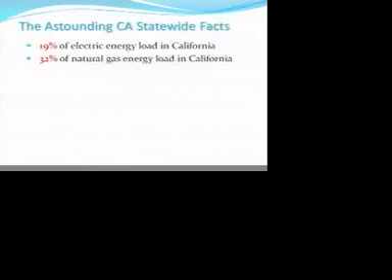32% of their gas load was related to the heating of hot water. So it seemed intuitively obvious that if you then could conserve water, you would be conserving energy, and that is a very important connection to make for the energy efficiency community. And the Energy Commission went even further, and they said, well, let's take a look at what would be really cost-effective programs. We've done so much energy efficiency program work, we don't have the same kind of low-hanging fruit that they have in the water efficiency world.

What if we were to consider taking all of our energy efficiency money, and I think it's something like $500 million a year, and put it into water efficiency programs? What would that look like? And the Energy Commission concluded that they could get 95% of their 3-year energy efficiency goal with funding water efficiency programs at only 58% of the cost that they currently pay. So it's a good energy efficiency investment. That's the bottom line. Water efficiency is a good energy efficiency investment.

And those kinds of numbers, I think, are very useful. Even though it's California and water has moved great distances in California, you net out that long distance movement, it's still a sizable amount of energy benefit that can be gotten from water efficiency programs. At the individual city level, it has an impact. 33% of a city's municipal budget can be for water pumping, their electric bill, that is. 33% of their electric bill can be just for water pumping.

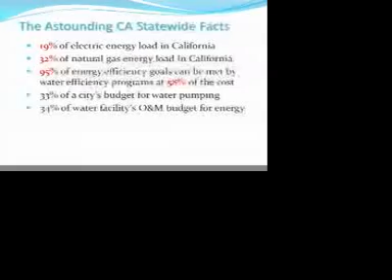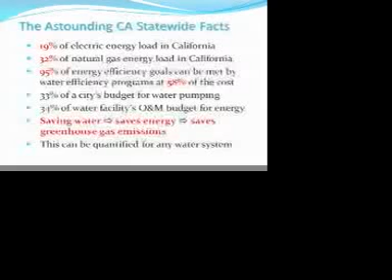34% of a water utility's O&M, operations and maintenance budget, often goes to energy because of the intensity of the treatment process. So all around, it's beneficial for the ratepayer, for the taxpayer, for the utility manager to look at water efficiency as an energy efficiency opportunity, because not only does it save energy, but it saves greenhouse gas emissions. And there has been a model developed that will quantify that for any water system.

And this is the Pacific Institute, again, getting involved in putting together a model for agricultural and urban water utilities who can take a look at their system operations and their water supply parameters and figure out how much embedded energy there is in their own water supply, and therefore in their water conservation programs should they undertake them, and compare it to their overall carbon footprint. So this model was developed by Gary Wolff at the Pacific Institute. I think it probably got some Energy Commission support and funding.

And now I know the Energy Foundation is looking at doing some further refinements to it, so there'll be new versions of it coming out that utilities around the country will be able to use. And so that work is underway, but you can go to the Pacific Institute website and you can download this model. Just go to pacinst.org, and in the search bar you just type in water to air model, and it'll pull up the page with the water and energy models for both the urban and agricultural water utilities.

So one particular water utility in California took that model and decided to test it, to do a little run through it. And Santa Clara Valley Water District, the wholesale water district that services the San Jose, Silicon Valley area, did an analysis of their operations, and they published a report called From Watts to Water. We have a couple of copies sitting there on the table. We also have the PDF of the report posted on our website, and I can email it to you if you give me your card.

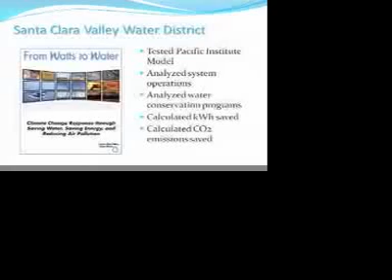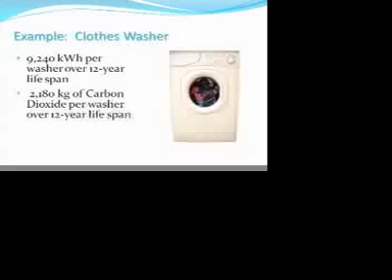But this is a terrific report because it is the first published example that I'm aware of a water utility taking a comprehensive look at what their embedded energy values are, and at what the benefits are of water efficiency technology to those analyses. So, for example, the clothes washer, they calculated in their particular program that they were basically saving over 9,000 kilowatt hours per washer over a 12-year lifespan of the washer. And they were conservative. They gave the washer only a 12-year lifespan, which I think we know is probably pretty conservative. And in that 12-year lifespan, they calculated that it saved over 2,000 kilograms of carbon dioxide per washer over that period.

And so if you aggregate all of their clothes washer examples, and you take all of their conservation programs that they've been undertaking since they started in, I believe it's 1992, the total energy savings that they've basically incurred in that program is equivalent to the energy that would be used by 236,000 households for 1 year. So that's water efficiency, that embedded energy translated into a direct energy savings that we had never really thought about before.

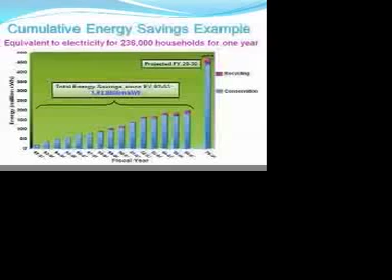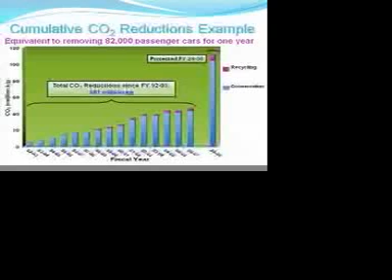And if you go further and you take that and convert that into greenhouse gas emission reductions, it ends up being equivalent in terms of carbon reductions to removing 82,000 passenger cars off of the road for a year. So this is a whole new benefit calculation that should help galvanize water efficiency efforts in water utilities, because not only do they have water scarcity issues to deal with, but they have energy scarcity issues and costs to deal with, which are often much higher than their supply costs are. And saving energy is an important benefit in their operations.

What are those opportunities? Well, of course, the energy benefit is higher if you're saving hot water, but it's also pretty good depending upon where you're located if you're saving cold water, like my Lake Arrowhead example. But the technologies that we're looking at here for joint water and energy programs are clothes washers, commercial 1.6 gallon per flush and lower toilets, because those toilets are flushed so much in the workplace. Landscape conservation, even though it's cold water, so much landscape water is applied that it has an inherent energy benefit. And we're looking at combined audits now for water and energy.

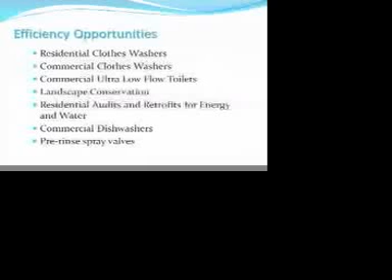You know, if we're going to go into a house, let's go and do compact fluorescents, energy insulation, and water efficiency at the same time. Let's treat it as one comprehensive package. Let's do the same in industry. If you've got a plant manager that's willing to let you in the door for energy, let's make sure we're there with the water issues as well. And then the new emerging technologies that are being developed, the new commercial dishwashers, pre-rinse spray valves that are getting more and more efficient, all of those technologies will have those resulting energy benefits, and we just need to be smart about calculating what those are.

So, okay, I talked about California. What does this mean for the rest of us out in the rest of the United States? What's happening out there? Well, there's a lot of work that's occurring in many different venues. I mean, when the River Network gets a grant to study the water and energy connection and is going to be doing meaningful work in pilot cities around the United States, you know it's bigger than just the water utility community or just the water efficient technology community. And now that statistics are being gathered up nationwide about what water and wastewater energy use is, there's starting to be some pretty interesting numbers.

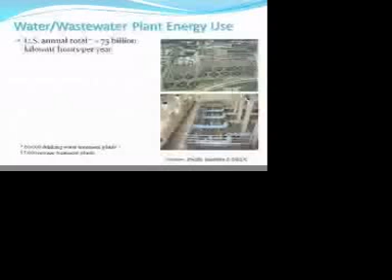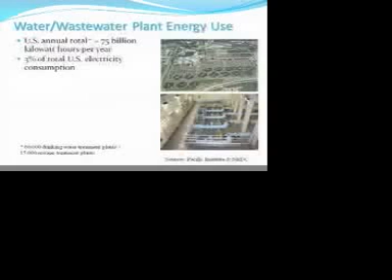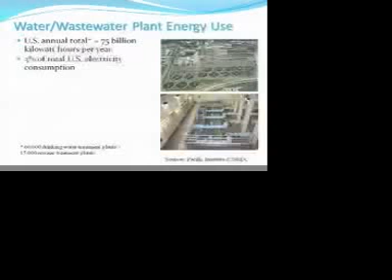About 75 billion kilowatt hours per year go into water and wastewater plant energy use. That's the estimate. That's the most recent. It's still pretty old, but it's an estimate that we need to refine, because again, I would submit that that's probably underestimating the true value of that water. 3% of U.S. total electricity consumption. That was an EPRI estimate, about 5 to 8 years ago, and Administrator Johnson said 4%. I submit that once we finally do the research, we'll find that the number's a whole lot higher.

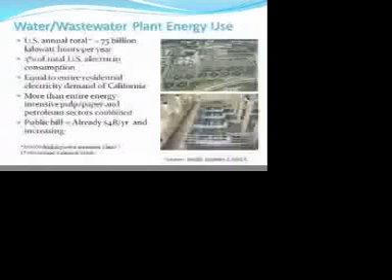And in terms of the bill, it's already costing us $4 billion a year and increasing for these infrastructure plants, for building new capacity, for maintaining them, for basically reconstructing them when they're exceeding their useful life. Those are all bills that we as taxpayers as well as ratepayers have to pay.

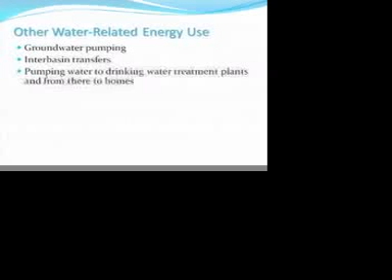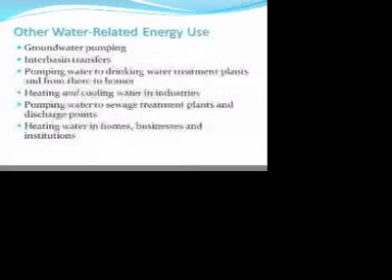And in this particular energy analysis, we have to look at the whole chain. It's not just that treatment process that we were just showing you on that slide. It's the amount of groundwater pumping we're doing. It's the amount of interbasin transfers that we're doing. It's the pumping actually to the house. We forget that utilities have different pressure zones and have to pump various amounts depending upon the elevations in the service area to make sure that the pressure is uniform when it's delivered to the consumer. Heating and cooling water in industries as well as households, pumping water to the sewage treatment plants and discharge points, and then hot water heating, which is a very big issue and one which now Gary has devoted his life to.